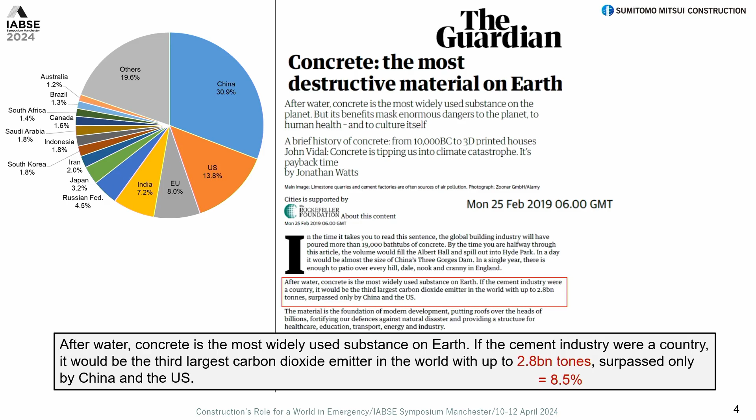So this is a very famous article by the Guardian in 2019. At that time, I had been belonging to the FIB for a long time, and we discussed a lot. At that time there was flight shame, but compared with the airplane, the construction CO2 emission is so large. So the next thing is concrete shame, something. So we have to prepare something.

And I was the president of FIB from 2021 to 2022. At the beginning of 2021, we launched an official statement to the public about what we did for a long time. I mean, in the Model Code 2010 we included sustainability, and now we launched already Model Code 2020. Sustainability is the center of the Model Code.

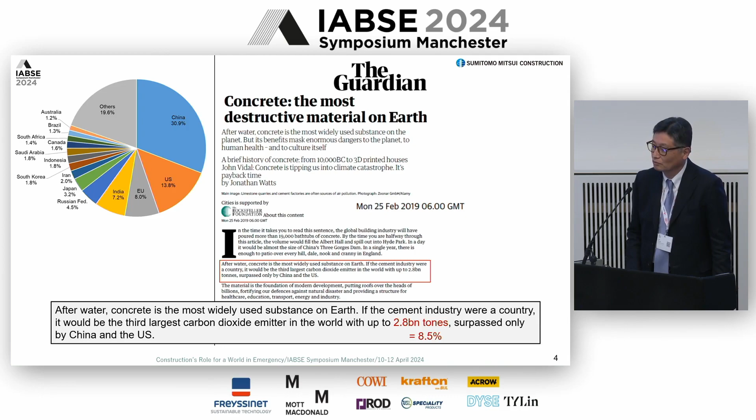But this is a fact. Concrete emits CO2 a lot, but mostly the CO2 comes from the energy. But as structural engineers, we have lots of things to do to solve this problem. At that time, I asked the secretary at the EPFL, since FIB is a structural concrete society, how much of the cement we use goes into structural concrete. Fortunately, they have the data. In 2015, about 60% of the cement goes to structural concrete. So many.

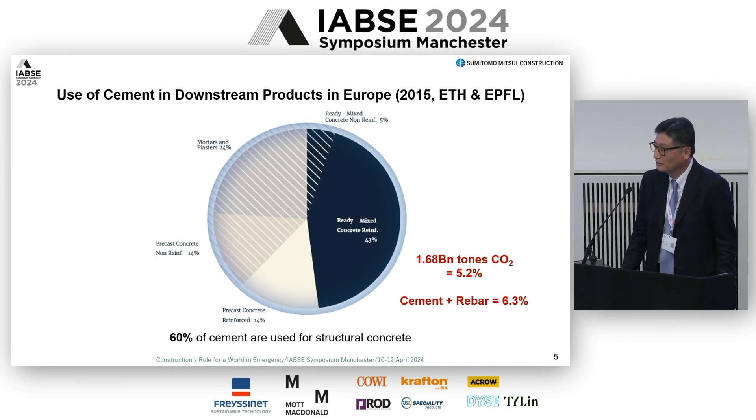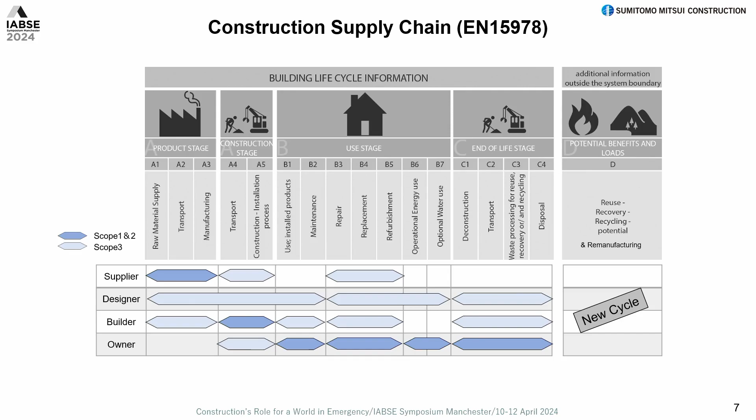And after that, we think about how to solve this problem. So we discussed a lot among the FIB society, and I use this supply chain European standard. It's very understandable compared with CDP and SBT. I'm from a construction company, so mainly the builder has the responsibility to reduce CO2 in A4, A5. But most of the CO2 emission comes from the material, A1 to A3. And the rest of the CO2 comes from the use stage.

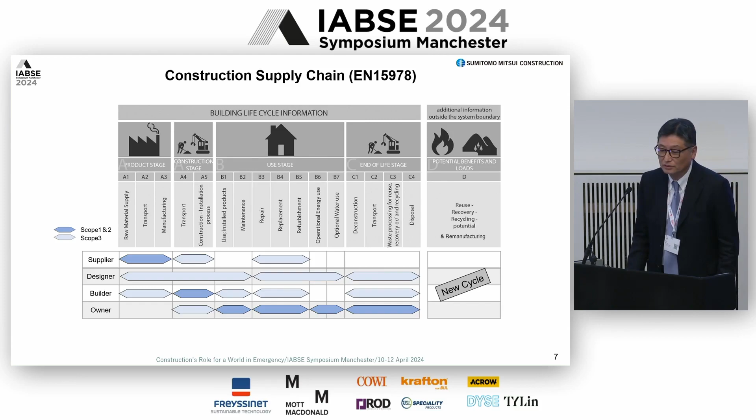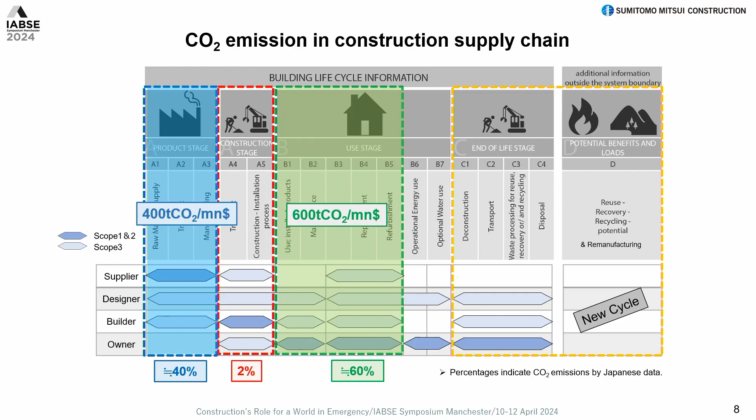So I checked the Japanese data, and I show you that per $1 million we emit 400 tons CO2, and in the use stage 600 tons per $1 million, because my company does construction of not only infrastructure but buildings. So the buildings emit CO2 in the use stage. And especially talking about infrastructure, A1 to A3 is 400, and B1 to B5 is about the same. I will show you later.

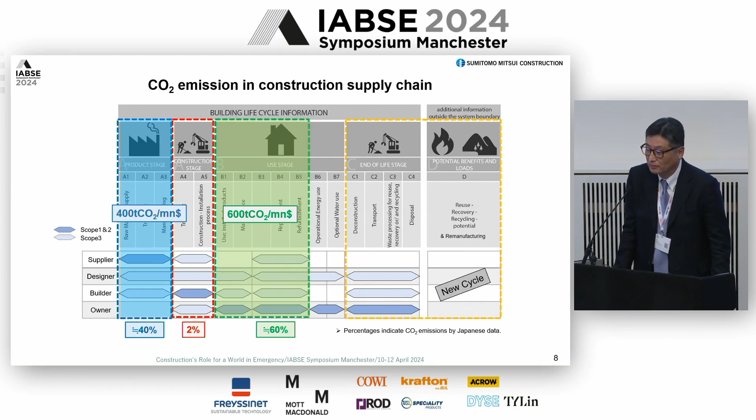So most of the CO2 emission comes not from construction companies' scope 1 and 2. The materials are scope 1 and 2 of the suppliers, and in the use stage the CO2 should be reduced by the owner of the building or infrastructure. So I thank you, Dr. Collins. This is a very, very useful database I use a lot in presentations in Japan.

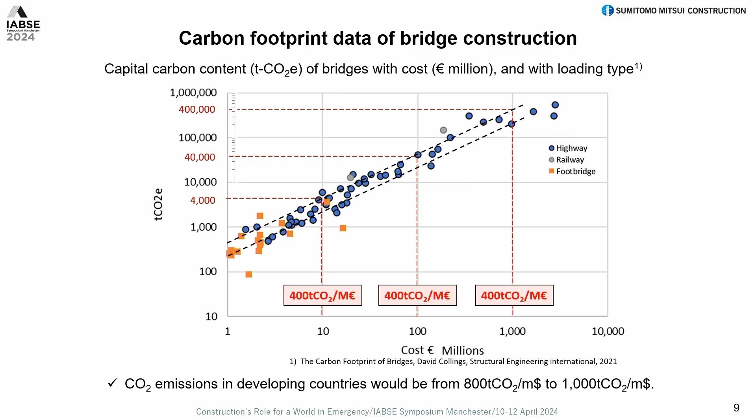This diagram shows the CO2 emission is independent from the size of the construction. Each million pound emits about 400 tons of CO2. So $1 million and 100 million yen are almost the same, about 400. 400 tons is a very, very useful index for practitioners to make strategies to reduce the CO2 of the construction industry.

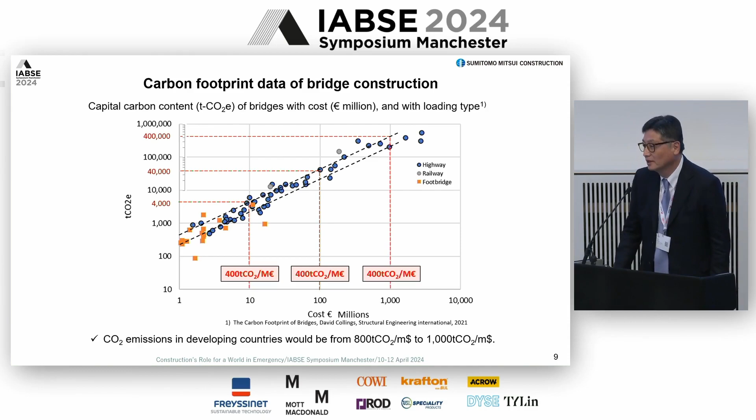400 tons CO2 per million euro, per million pound, per 100 million yen. It's the same in developed countries, but in developing countries, where we did a lot of projects in Southeast Asia, it's about 2 times, 3 times, 800, more than 1,000. It makes sense because the consumer price is cheaper. So this is a very conceptual diagram from the material, construction, and the use stage.

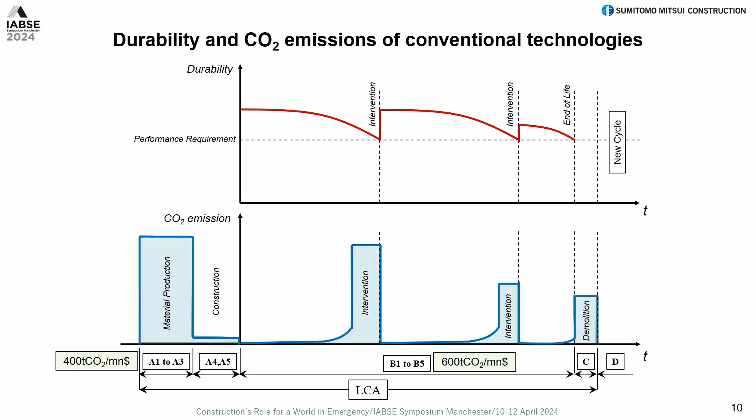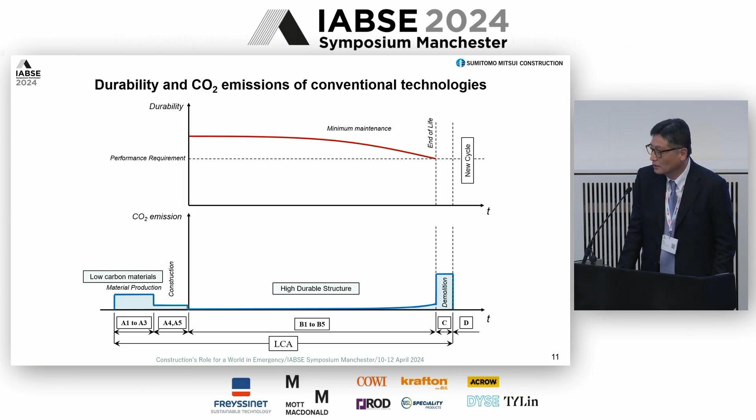And in Japan, we discussed a lot of CO2 emission by the materials, but at the same time, as I said before, in the use stage B, they emit CO2 because maintenance is the same as construction. So now we don't have any database in the use stage. In the FIB, we have started to collect data like a database of bridges, as I showed before, in the maintenance stage. It is very important to reduce the CO2 strategies. So ideally, we reduce the CO2 in the material, in the construction, and also the use stage like this.

And at the same time, I checked industrial data of the Japanese CDP database. For construction, as I said, scope 1 and 2 is very small, and scope 3, I mean from material and from the use stage, is dominant, about 98%. So it makes sense. Finance is very small because they only use electricity, and aviation and transportation emit CO2 in scope 1 and 2. So it is not so easy to reduce CO2. Some aviation companies use biofuel, and manufacturing, electricity, they use a lot of CO2 in scope 3. So maybe the tendency is the same in Europe and other developed countries. Anyway, construction emits CO2 in scope 3.

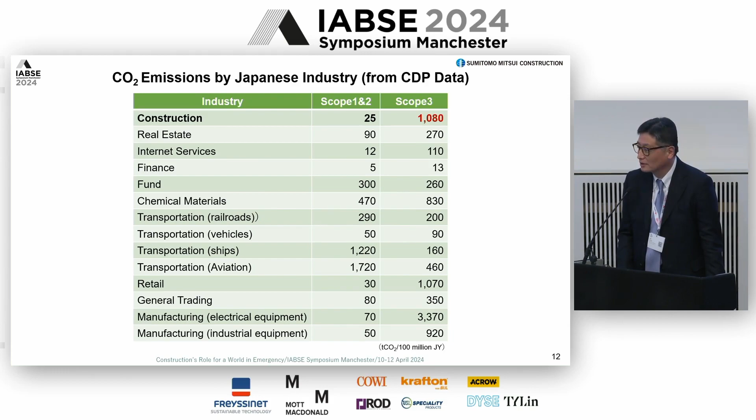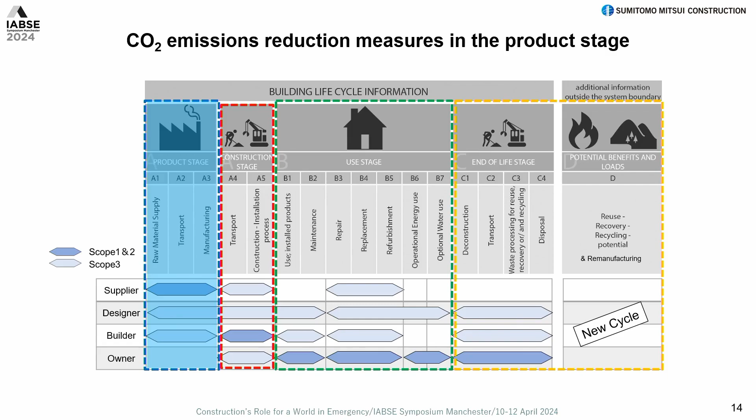Okay, so how do we reduce CO2 by using useful technologies available at this moment in the material stage, A1 to A3? I'll show you an example. In my company, we already have zero cement concrete using byproducts: silica fume, blast furnace slag, and fly ash. And the theme of this IABSE is emergency action. So by using these byproducts, we can reduce CO2 a lot, up to 70%. And fortunately, the strength of this concrete is more than 100 MPa, so we can use this material for structural members.

And this material's dry shrinkage is very small, and creep is also very small, about 1/3 of conventional concrete. Also, mixing water can be reduced by about half compared with conventional concrete, which matters because in Japan we use drinkable water for mixing concrete. So we can reduce water by using this zero cement concrete.

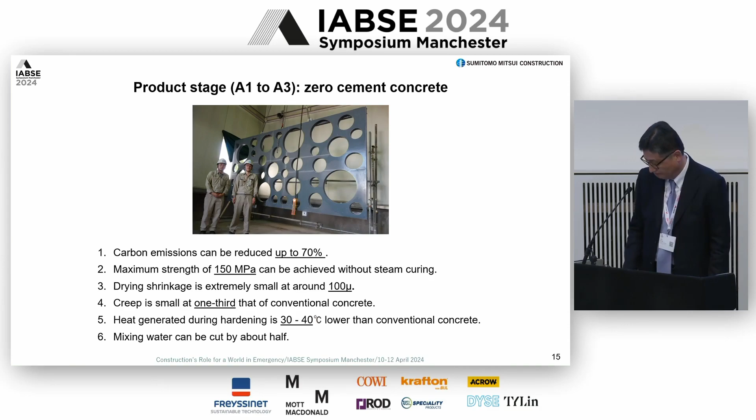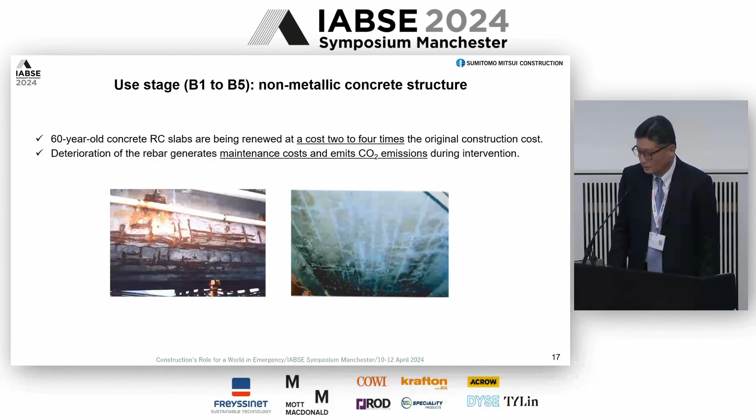So, in order to avoid this, we cannot use steel reinforcement. So we had a project with a highway company since 2010 using plastic fiber as tendons. Of course, this concrete is expensive, but we can reduce the weight of the superstructure. We call it a non-metallic DuraBridge. At that time, the highway company told us the initial cost can be 50% more expensive. Compared with the maintenance cost, which is sometimes 2, 3, or 4 times, 1.5 times is reasonable for them.

So at that time, we had technologies to use aramid fiber for tendons, because 30 years ago we focused on this new material. But unfortunately, it was very expensive at that moment. But now we have fiber reinforced concrete, so we can reduce the initial cost to 1.5 times.

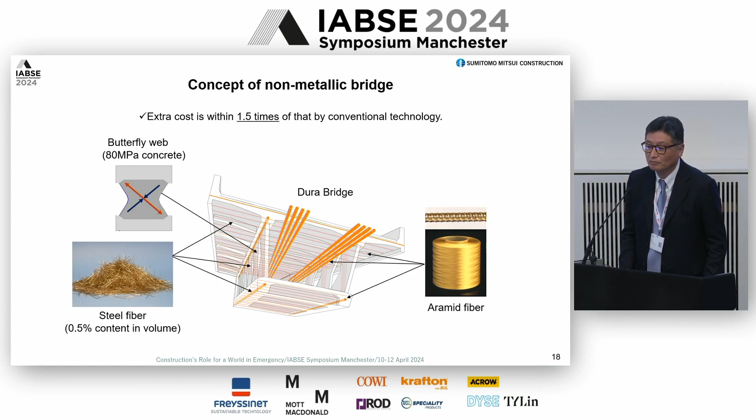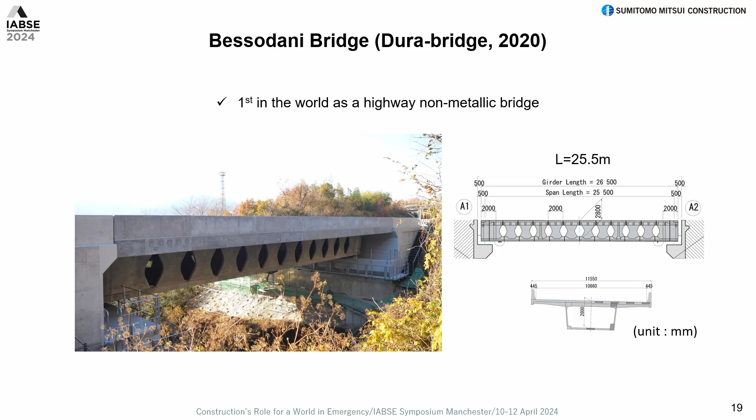And in 2020, we built the non-metallic highway bridge in Tokushima Prefecture. The span length is very short, 25 meters, and it is completely segmental construction. You can see the yellow tendon is aramid fiber. The web, we call it the butterfly web, is only 15 centimeters thick, with no rebar, of course. And we use external tendons in the right-hand side photos.

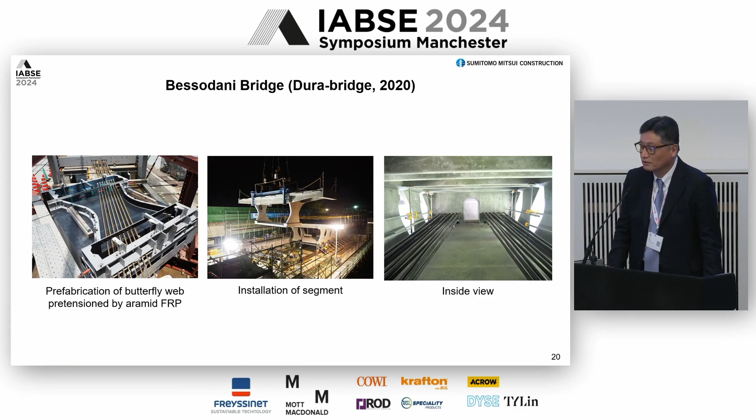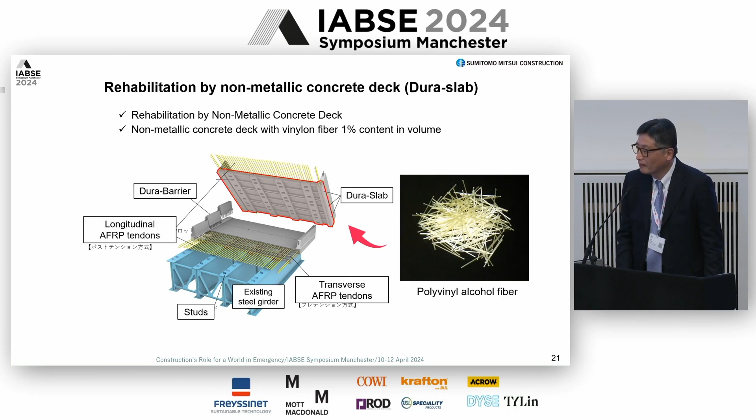At the same time, as I said before, we now have deck replacement on so many bridges. The highway company tried to use non-metallic technologies in this deck replacement, a non-metallic deck. In this project, we use polyvinyl fiber in the deck, and not only in the transverse direction but also the longitudinal direction we use aramid fiber, both directions. In 2021, we already built one non-metallic deck replacement.

We expect no maintenance of the structural members, though of course accessories have to be replaced in the 100 years lifetime. But basically, including the concrete barrier, we didn't use any steel reinforcement or tendons, so I hope there is no maintenance during its lifetime. So they can reduce the maintenance cost a lot, which means at the same time the CO2 emission during use stage B.

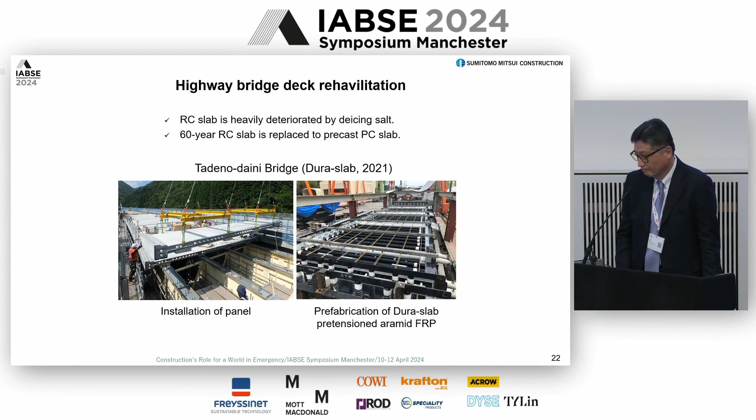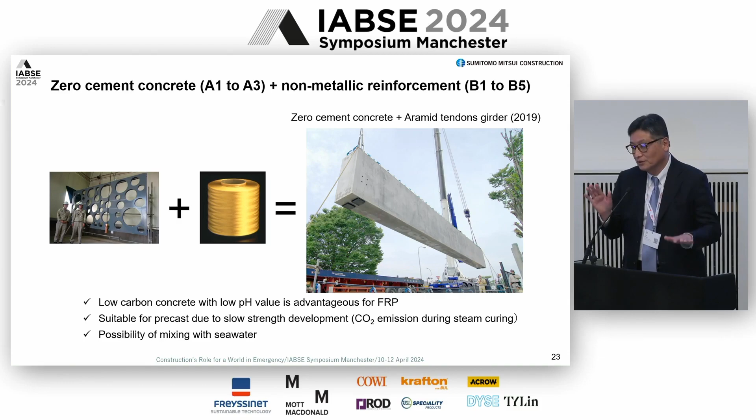So in the factories, we can provide this new material, but our wall is the price, about 2 times, 3 times compared with conventional concrete, and sometimes the client doesn't want to pay. So this is another problem, but as you know, the Japanese carbon tax is very low, about $3 something. But I know that in Europe, the carbon pricing is much larger than that. So it's the compensation between the tax and the price of the new material.

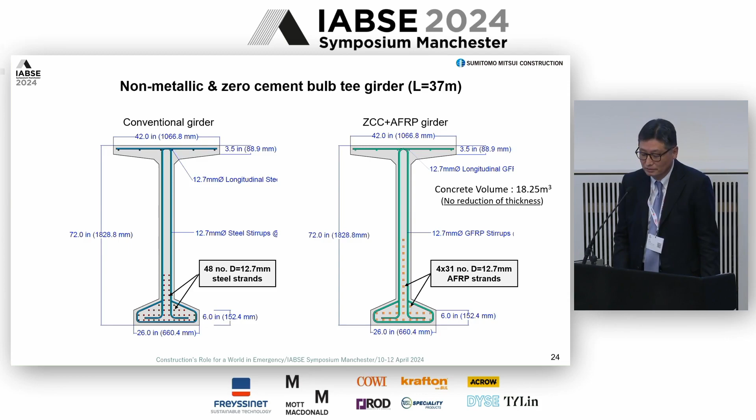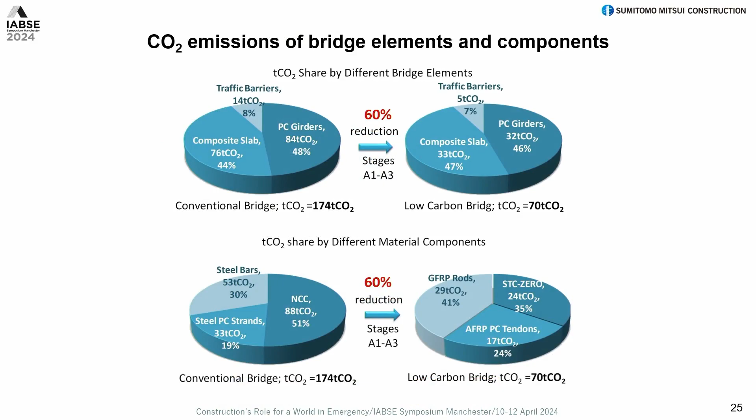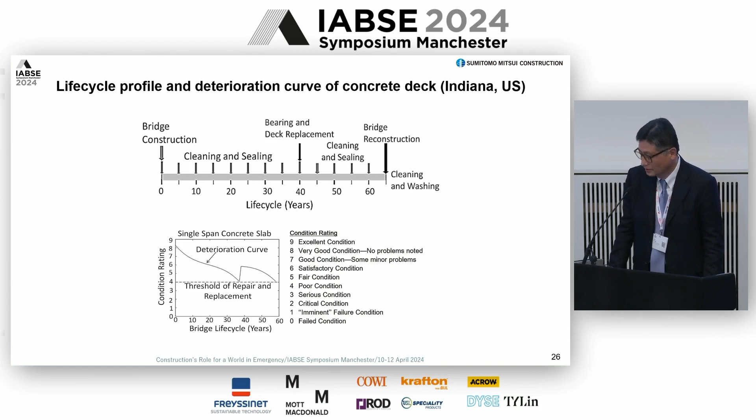We tried to calculate by using an AASHTO girder with conventional material, and also zero cement concrete and aramid fiber. And this is the result. In the material stage, we can reduce 60% of the CO2. And also, I used the lifetime scenario from Indiana, United States. It's very convenient. And finally, we compare conventional and low carbon bridges in life cycle assessment.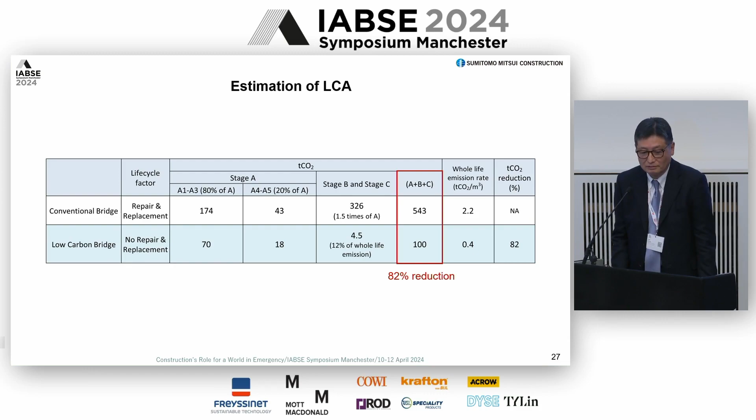So stages A, B, C show that we can reduce 82% CO2 by using the present material and low carbon technologies. So we can do that. We can do it now. But as I said, we have some very high walls to use this. I calculated this reduction using a carbon credit of, for example, 150. This reduction means about $270 per cubic meter. So we can call this the green premium, mentioned by Bill Gates in his very famous book.

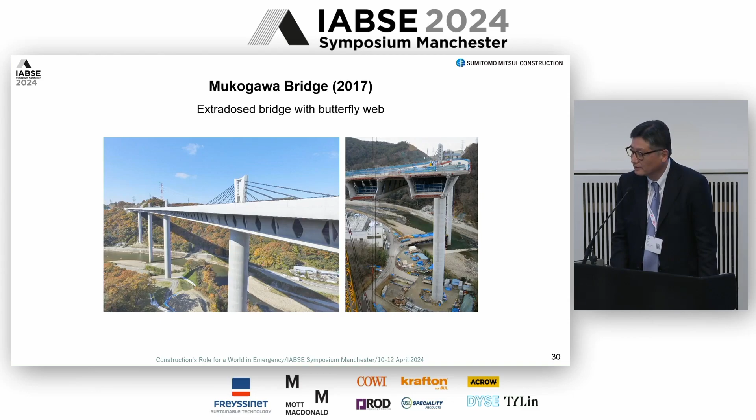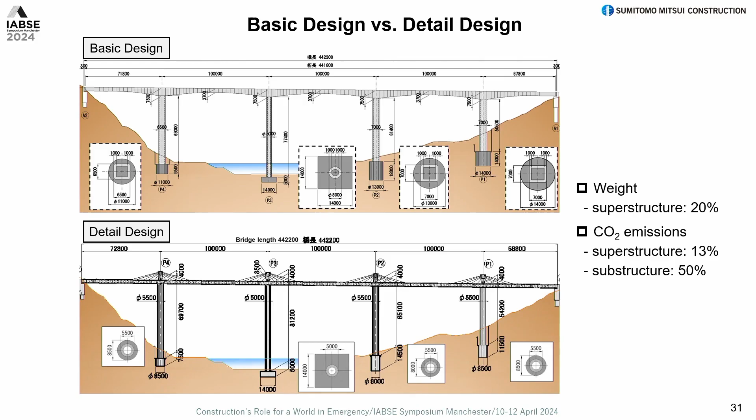Okay, so another way to reduce CO2 is a lighter structure. This is a highway extradosed bridge with butterfly web. We did the detailed design, compared with the basic design, which used a conventional box girder type. In this project, the most difficult condition is the width of the pier at the river. Its maximum is only 5 meters. So everything is concentrated. I mean, the right-hand side piers should carry most of the force during earthquakes.

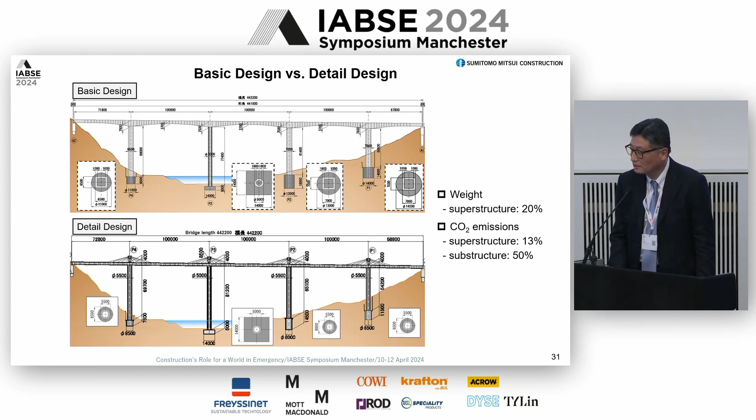So we reduced the superstructure, and we made all the piers flexible at the same time. So finally, we can reduce the earthquake force. Then we can reduce the weight of the superstructure by 20%, and CO2 emissions, especially for the substructure, we can cut in half. So we do this right now by using these technologies. With the lighter structure, the CO2 emissions are very low. Okay.

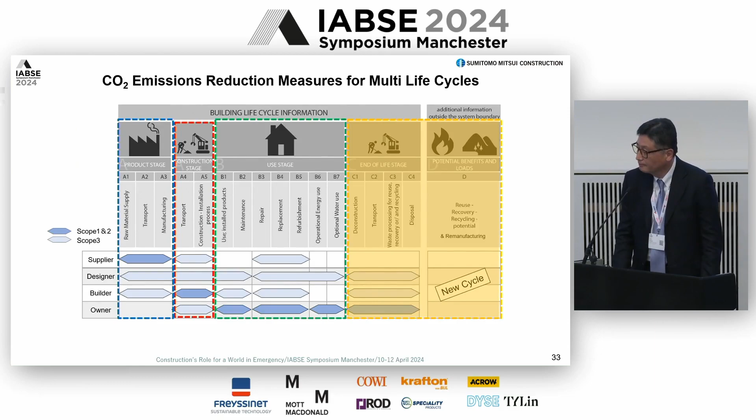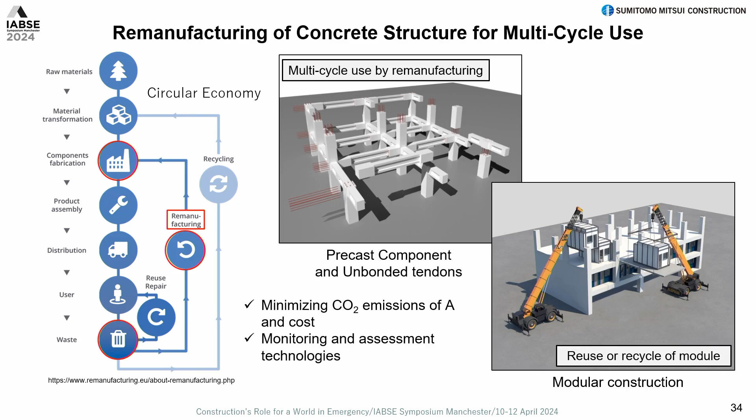We have to think about dismantling and reuse, as you discussed before. So this is one example, a precast building using unbonded tendons, and it is very easy to dismantle. And especially the room is a modular type. We can reuse and recycle this modular type room, and also dismantle it, check it in the factories, make it like a virgin material, and use it in another project. Which means that we can reduce the CO2 in stage A.

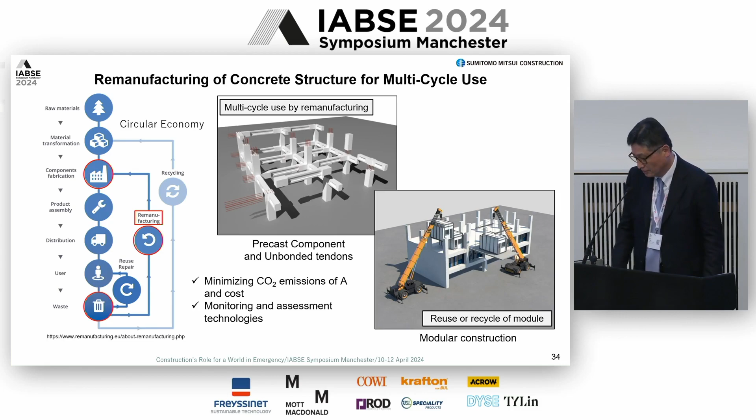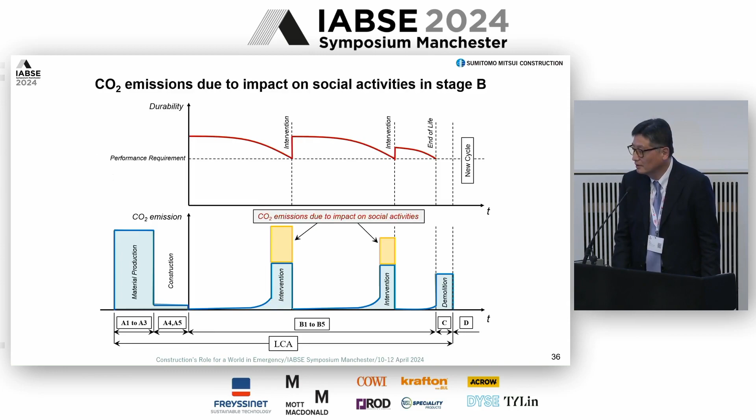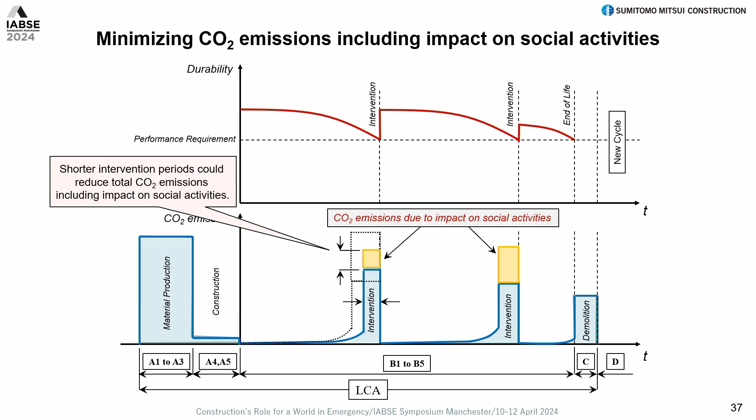Okay, another thing is we should act from now. In the maintenance process, we don't think about the influence on society, but if we can reduce the construction time in the maintenance process, we can reduce the CO2 a lot. I mean, indirect CO2. Fortunately, we have data from Germany. It's the Beton-Kalender data.

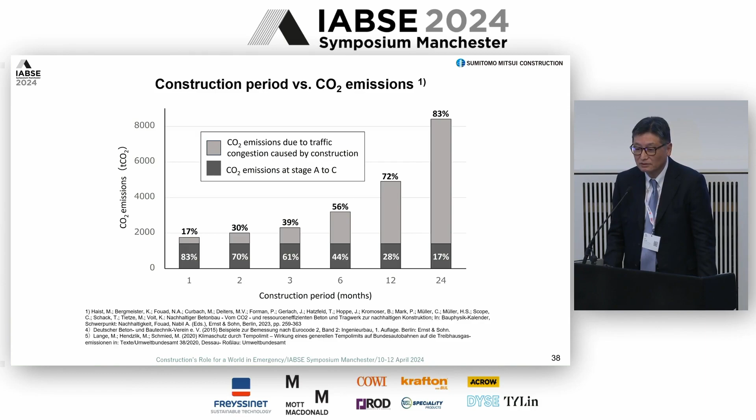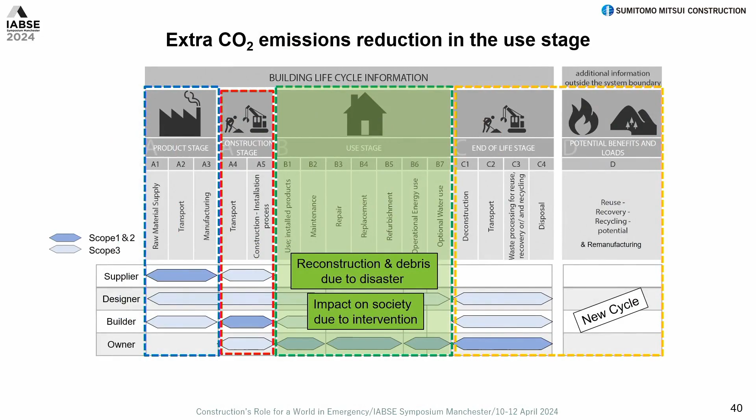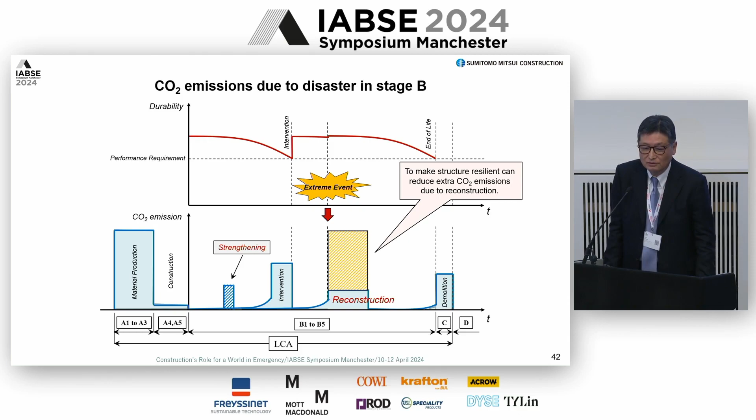Another thing, during the use stage: as you know, in Japan we have earthquakes and also many rains in the rainy seasons. For example, if the event occurs, we have to reconstruct after the disaster. But if we spend a very small amount of money before that, I mean, make the structure resilient, we can reduce the reconstruction very, very much. This is a report from the Japan Society of Civil Engineers. I'm sorry, this is Japanese yen, so please divide it by 150, 190 something.

So this is the earthquake in the metropolitan area, the Kanto earthquake. The last time was more than 100 years ago. So we lose 855 trillion Japanese yen, very, very much money. But if we spend a resilience cost of about 10 trillion yen, we can save the money, 273. It's about 34%. So only 10 trillion saves more than about 300 trillion.

The problem in Japan is the Ministry of Finance; they said we don't have any money. The recovery after disaster is construction, and construction means emitting a lot of CO2. So in order to make it resilient, we ask the private investor, okay, this is ESG investment, and we can return a lot of money. So this is very important, especially for Japan.

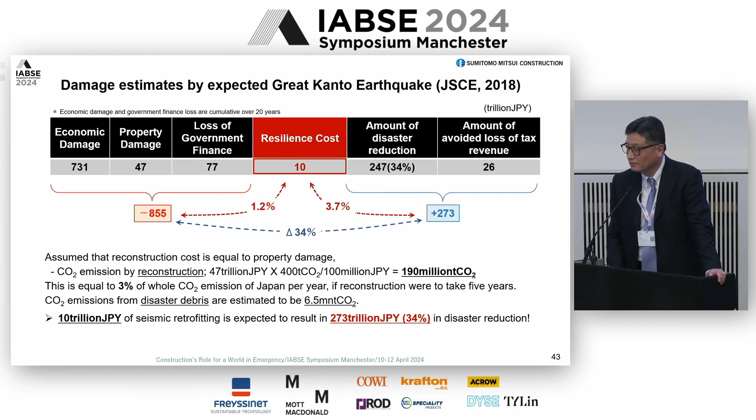So now I'm the executive fellow of the company, so I withdrew from the front line of the management of the company. From April, I am the principal senior researcher of the University of Tokyo to do some government projects, to install our technology in society.

One of the projects is for the local governments of Japan, which don't have money for maintenance of the bridges. In certain cities they have 800 bridges, and some bridges are very important but very old and deteriorated. So we simulate if this bridge closed: the east side is industrial and the west side is a city. The city people and the companies lose a lot of money. We can simulate this kind of event, and we collaborate with financial people to make a scheme as ESG investment.

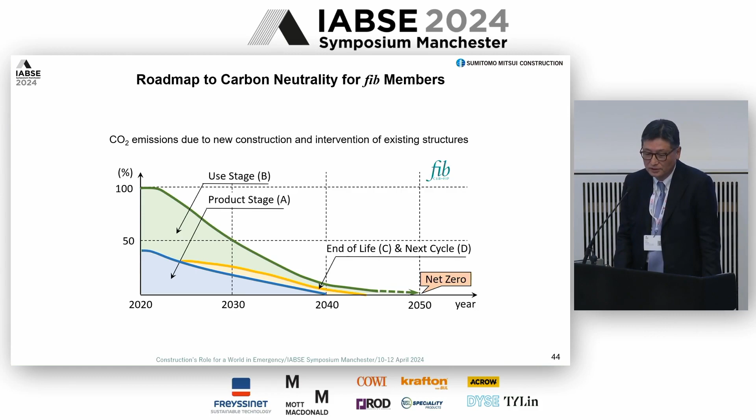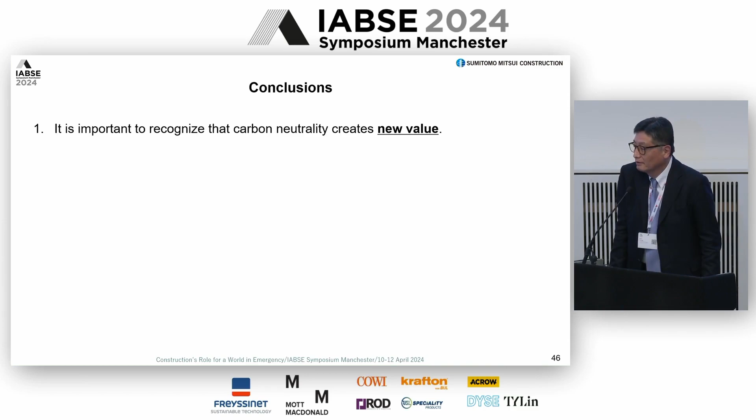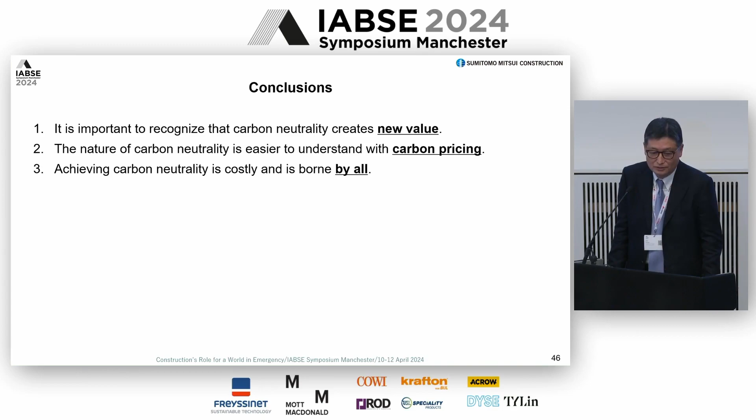Okay, this is the conclusion, and especially a message to the young engineers. Carbon neutrality is a new value, and carbon pricing is very important. Unfortunately, Japan has a very low price. Everybody says that carbon neutrality and new low carbon materials are a cost, but all of the people in the world should pay.

For A1 to A3, using byproducts is a transition up to, I don't know when, zero carbon cement and zero carbon steel are realized in society. It's a transitional way, but some clients ask us to do it immediately, and without any solutions we have to disappear from the bidding. So it's a very serious situation now. In the use stage, we should use ultra durable technologies. Also, studies on the relation between durability and CO2 emissions lack data, so we have to collect this kind of data right now.

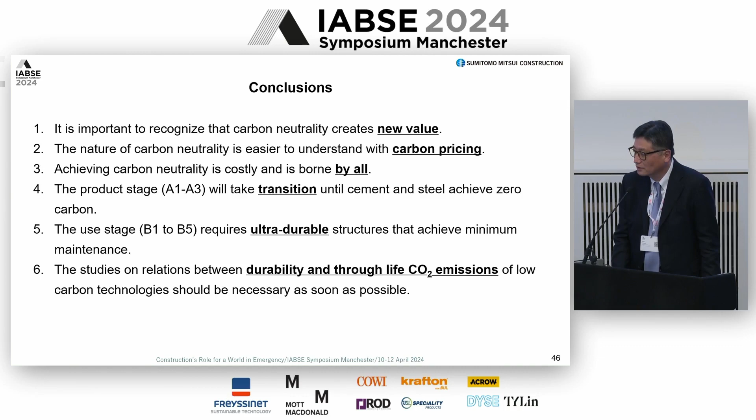And resilience is very important to reduce CO2, not only against deterioration but against disaster. This morning, Russia had a flood. Floods occur everywhere in the world. So we have to think about how to make structures resilient, produced by smart engineering knowledge.